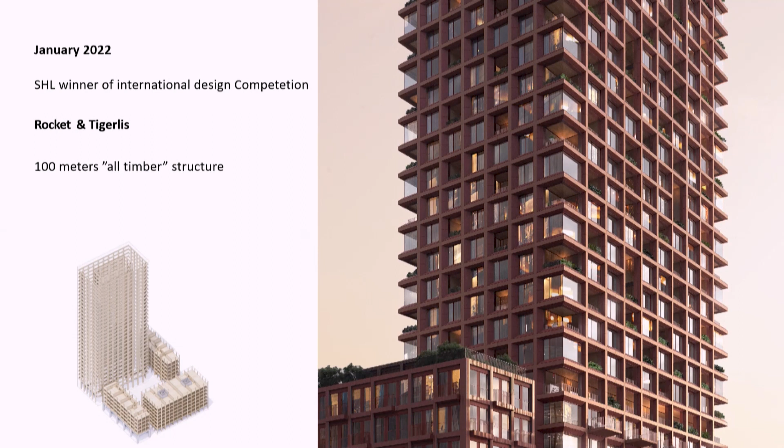But first, is this working a little bit slow?

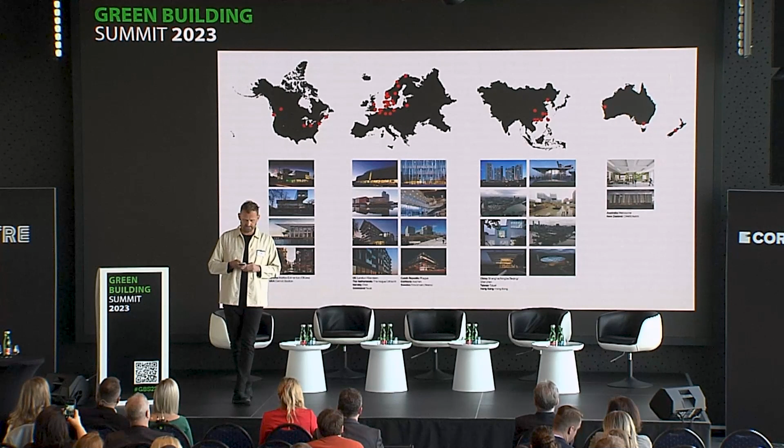Our portfolio is also all around the world. Of course, the main load of our work is around Scandinavia and in Europe, but we are also working in Asia and as far away as Australia and North America. One of the reasons that we get around the world is our qualifications on libraries and public buildings. We have built libraries in New Zealand, Australia and Canada. But as a firm, we have the full scale of work, from very small projects into master planning and urban planning. We span quite wide, but the main load of our work is, of course, buildings in the middle.

The context to frame our present work is, of course, that we are facing this heavy CO2 emission that is a big threat to the globe and to our climate. And a large part of that comes, of course, from construction. And we all know now that the climate crisis is real. I think you need to be very hard-headed if you should object to that. And that has, of course, created an increasing political awareness during the last decade.

We were already in the early zeros. We already had a big first take on sustainability and having a policy in the company. But we faced, as everybody did, the crisis in 2008, the financial crisis, and then we lost momentum in a way. But then we got started again after the crisis. But what we have seen, all of us, is this political awareness has increased, and that has actually speeded up the process. So many of these things that I'm explaining about is more or less our current environment in Denmark with our politics, and it's more or less the same in Scandinavia, I would say.

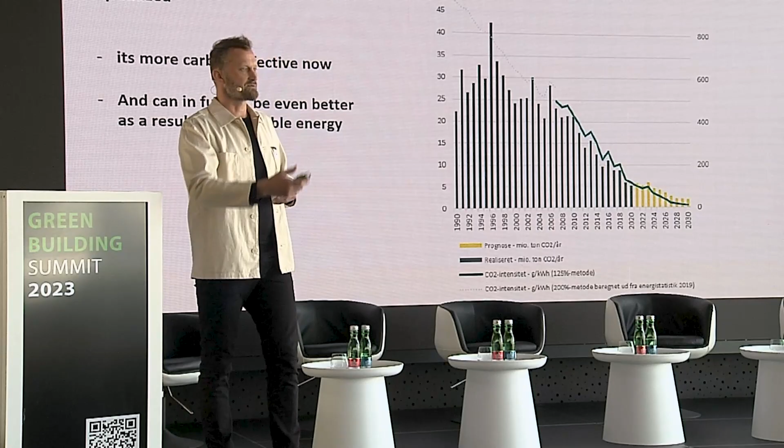But this is what we have experienced during the last 3-4 decades, that the codes and the standards have improved a lot in the way we produce the energy. Everything has been optimized since, I would say, the 90s, and it seems like we have reached a point where we get as good as we can, even with sustainable and renewable energy. When I came here yesterday, I drove from Austria, from Vienna, through this big area of the windmill park, and this is the way forward. So when you look at the curve, it seems like we have done well and optimized the way we produce energy, at least in Denmark.

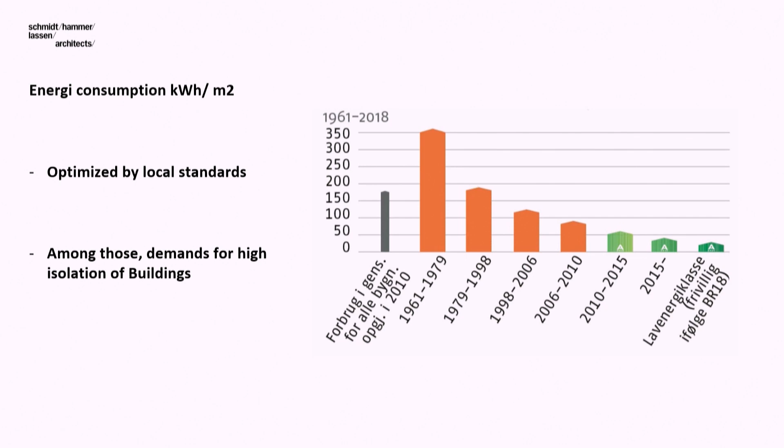So another thing that we have optimized during the last 3 to 4 decades, since the oil crisis in '73, where the Arab countries closed the well, then we got the first focus on energy and heat insulation. And since then, we have actually, as you can see, made our buildings more and more effective in regards of energy consumption, in regards of insulating the envelope, even to an extent that I would say that it's even too much how we insulate it. If you focus on the carbon emission that comes out of that insulation, we have reached a point where this is also at a top level.

So where we can do better now is actually on the resources we build into the buildings. That's what's happening right now, and that's what it's all about when we talk about embodied carbon. And worldwide, I think it's 39% of the carbon emission actually comes out of what we do in our industry. And of course, if you separate the numbers, the operating energy and carbon still takes a lot, the 28%, but we could work with those 11% that come out of the embodied materials. So this is what we look into.

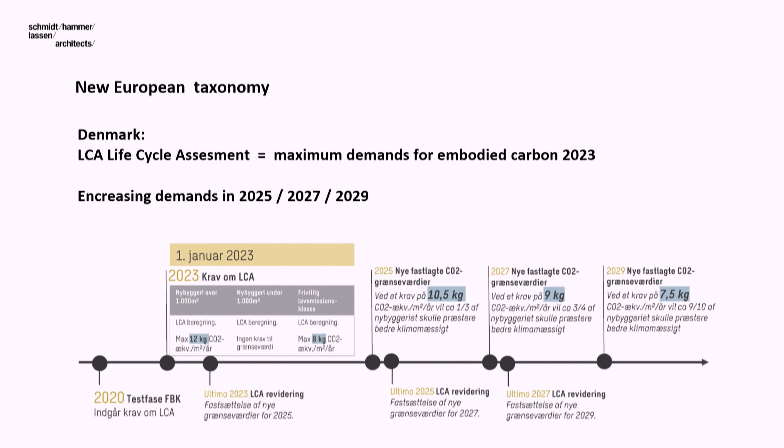I think in the first lecture it was mentioned that we already this year in January started to work with a restricted amount of carbon that we can build into the projects. And this is how it looks right now, that we need to calculate this during the process from the early stages in order to secure that we know what we are doing actually. At the moment, the target is 12 kilos per square meter, and we did the first test in the office in a very early stage. And it's not complicated to do these calculations. It's just because we don't know it. It's actually quite an easy tool to use.

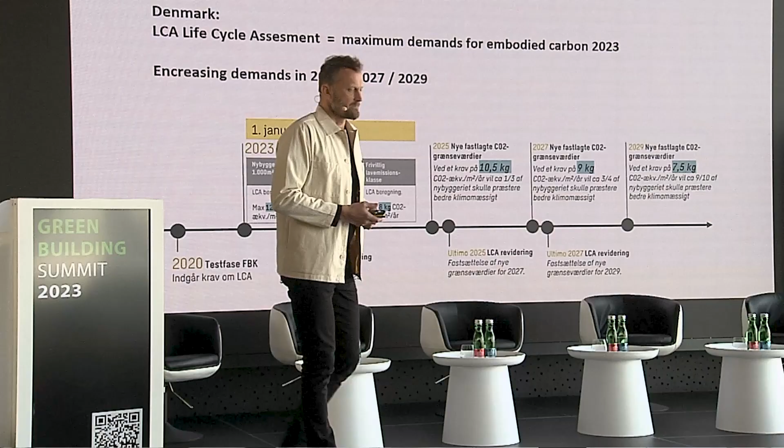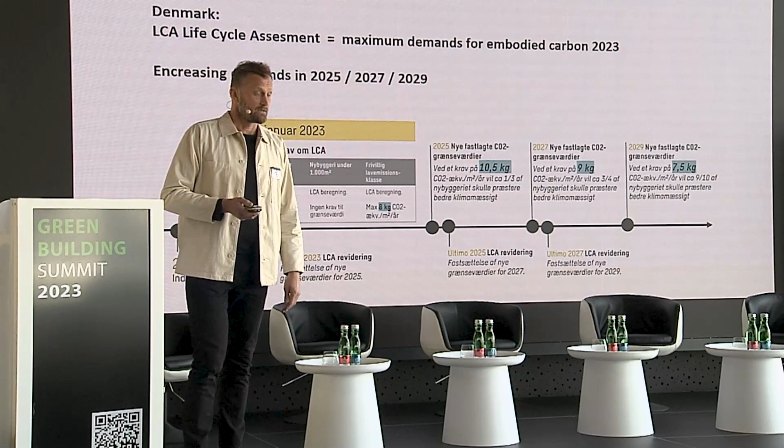But we also can see that it's not a very ambitious target, those 12 kilos per square meter. So we must speed up that process in order to get down to where it gets to be a game changer in the industry. And that doesn't happen in '25. It happens maybe in '27. There we are where we need to be, or maybe even in '29, I would say. But this is the way we work in Denmark now, and I can say that it's not frightening. It's not a lot of documentation. I think it's the way forward for all countries.

So it's very easy for me to say, but I think it's as simple as this: we need to replace as much as we can with wood. I mean, steel and concrete, we still need it in the foundations, in the zones that have contact with the soil and the earth and so on. But we need to change the way we build today from a concrete world into a timber world.

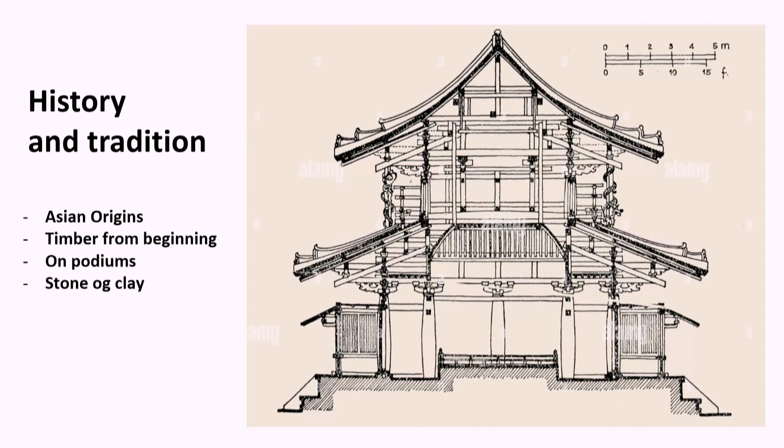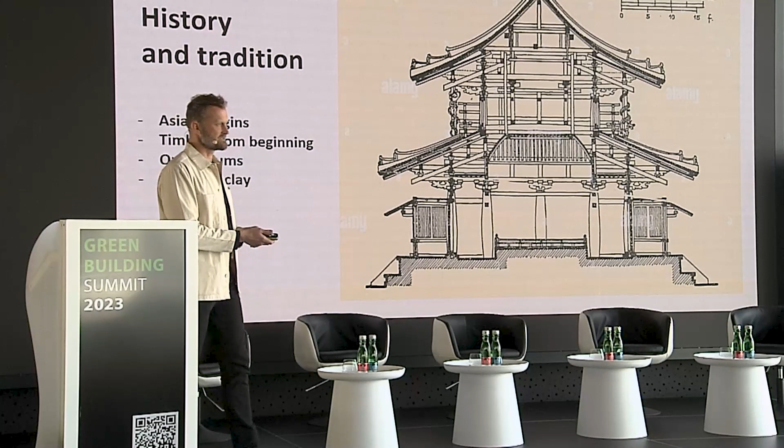And that's why I want to look a little bit back into the history and tradition, because, it's a personal opinion, but I think that what we see as architecture actually originates from some of the earliest civilizations from Asia, and has created the languages that all architects are still using. And this is typically timber architecture, because those were resources that could be harvested, they could even be grown. And then you would, of course, lift these constructions and structures, a little bit fragile to moisture, up on podiums, either of earth or stone. So this is 4,000 years ago.

And locally in Denmark, we have a tradition that, I mean, with the Greeks and in southern countries, you can find the palaces, you can find the Roman temples, the Greek temples, still more or less intact. In Denmark, buildings from the Iron Age were made out of timber and wood. We can only find the black spots when we excavate areas from that time. But this is how it looked, this is how it started. It was all organic, all bio-based materials, but with a very beautiful and understandable, it's very hard for you to see, but a very clear structure.

Even in Slovakia, in your local context, I didn't visit this, but I think that you still have these buildings in the mountain region. So it's a part of our common building tradition that we need to refine and revisit today. So we need to look back, but we also need to look ahead. A little bit about what we have done in Schmidt Hammer Lassen.

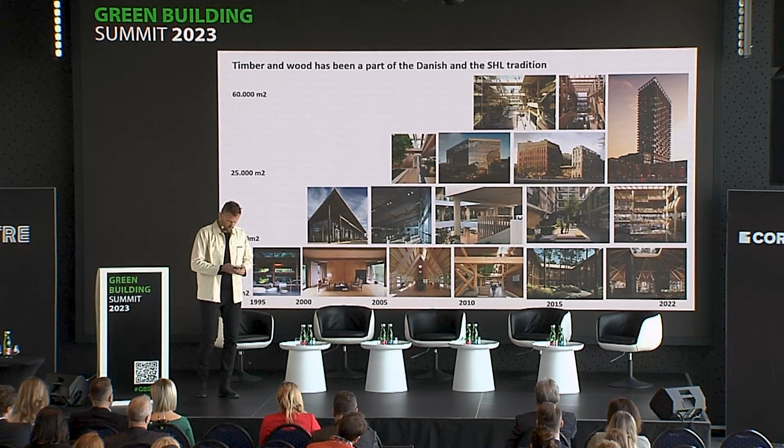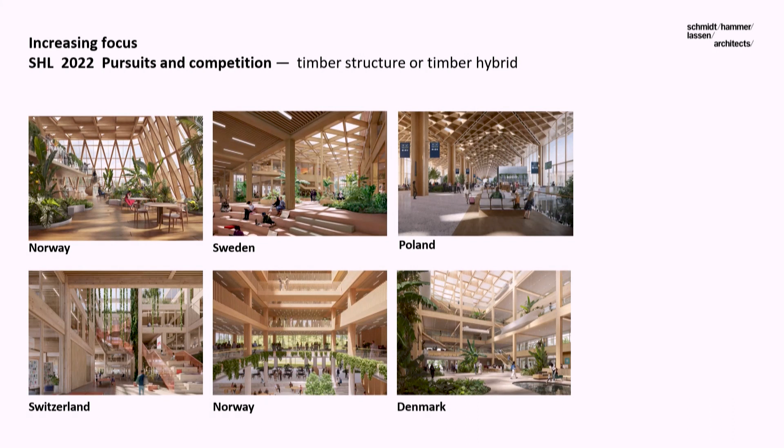Right now, our focus on trying to implement timber as the main structural material is so strong that we did 10 competition proposals last year, and out of those, 8 of them were either pure timber projects or hybrid timber and concrete projects. So it is really our main focus at the moment.

It's hard to explain in these photos, but one of the things that you experience when you go into timber structures and wooden-clad buildings is this amazing indoor climate and environment. It's a game changer. It ties into the well-being of people, and that is amazing, since we all need to build with timber and wood in the near future.

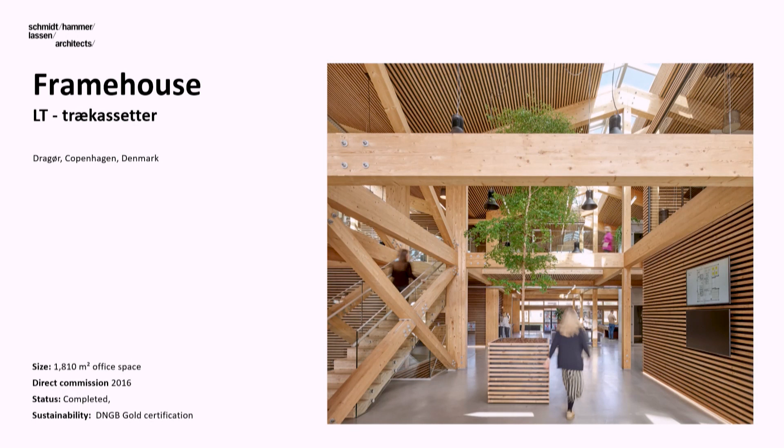Another project is a very simple one. It's also a prototype in our portfolio. A very small office building. It's a shared office facility, and the idea is actually quite simple. For as long as I can remember, we have had sports facilities, swimming pools, farmhouses built in this frame technique, similar to what some of the American cultures did when they settled the American countryside. And this is again very low tech, very simple, old school techniques that can be built up to a certain scale.

And this house is also an example. If you have the chance to go there, it's an example of an amazing indoor climate, where you have a fully open office on 2 stories with a lot of different small companies sitting in the same building, but with none of the problems that we know from modern office buildings where there's terrible acoustics, even in this one.

So it's hard to explain when you show the images, but it's a real game changer.

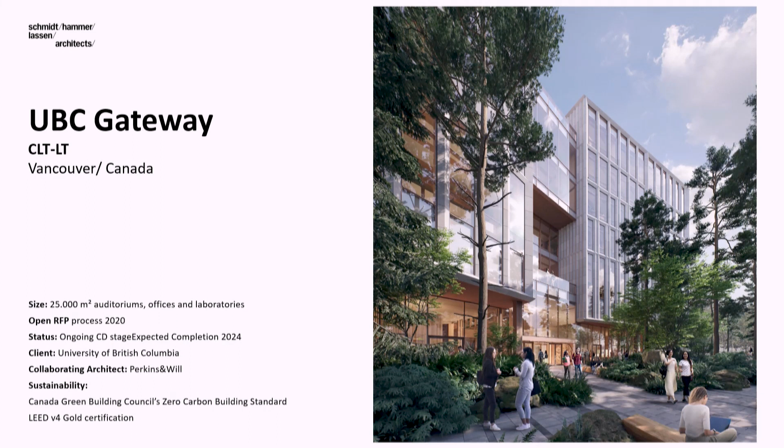Then we have somehow scaled this up in a project in Canada, where we are working on a university campus. This is more or less the same idea, but scaled up into a larger scale, 25,000 square meters. You can see some of the interior, and the feel is more or less the same as before, but now this is getting bigger. This project already had its groundbreaking, so it's something we can investigate in a couple of years.

And that is also laminated timber and cross-laminated timber, all of it.

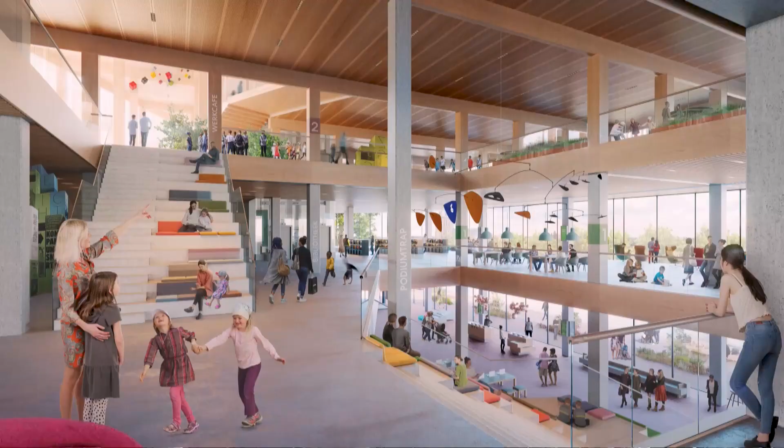Another example is a competition we won in Dordrecht, Netherlands. All the Netherlands is, of course, below water level, so even though they have this risk of flooding, they also accepted to build in timber. The first couple of floors is built in concrete to reduce the risk when it floods, because they know it will flood. But then we have a hybrid of timber and concrete in this town hall building.

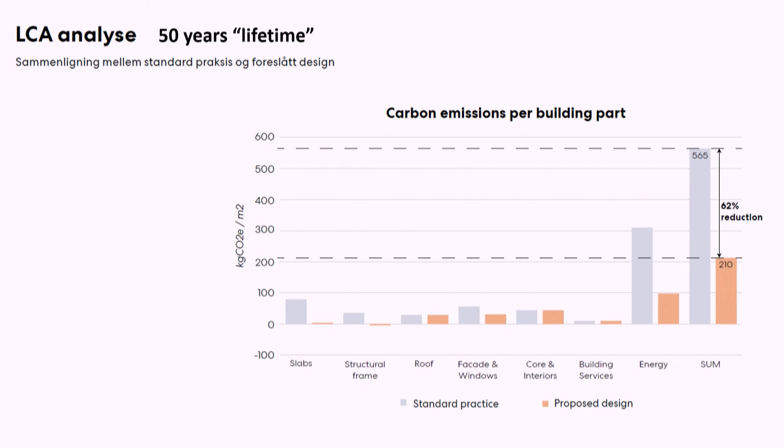And for now, in recent years, we started, even when working in competition stages, to analyze quite early in order to see where we can improve things, because we know that the earlier you start modeling and working with the building mass and these issues, that's where you can make the big impact.

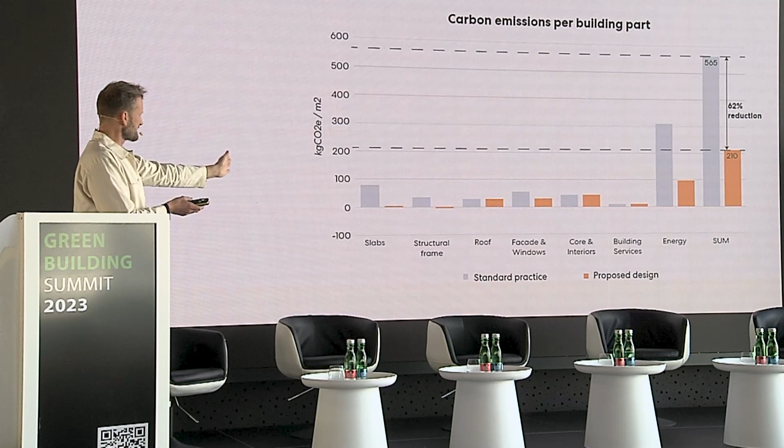This is a very rough calculation based on a competition proposal, but it shows how it compares to a traditional concrete and steel structure, where you can see the different building elements compared over a 50-year lifetime. We can still see that in the 50-year lifetime, the energy is, of course, one of the big consumers. But what we are working with as planners and architects is all of this, the heavy building parts.

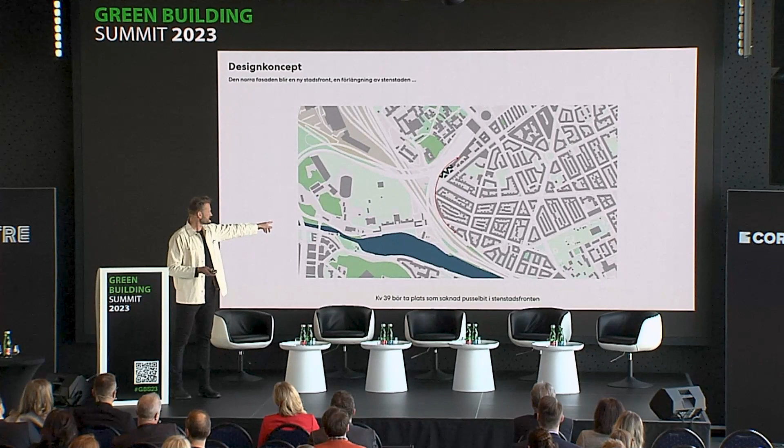And then to Stockholm, where we recently also won a competition about a life science building, which is this one here. It's somehow finalizing the city center, the compact part of Stockholm, and the conditions, the neighbors, is this big transportation highway in the surroundings of the city center.

And the building consists of one element, which is this zigzag shape structure of laboratories and workspaces, and two little buildings for professors and people who are working in this facility. It's also supposed to be, or projected to be, a timber structure.

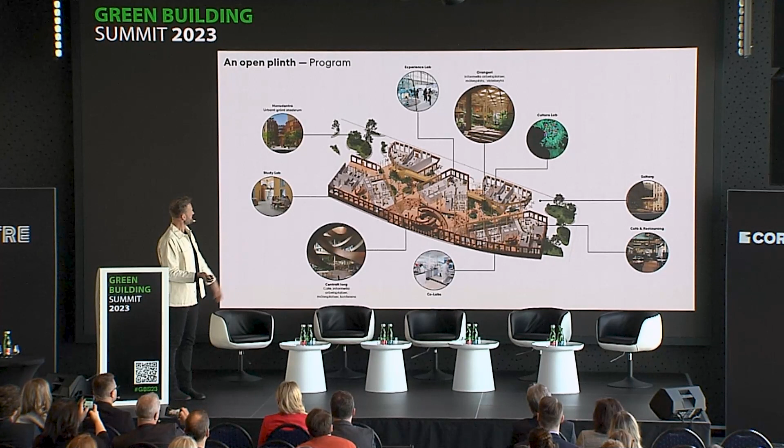Here you can see, of course, a lot of thought about social sustainability, all the involvement, all the social activities is always a part of the projects that we do. Now my focus is on the structures. So again with these atriums where you can see all these chances where people can meet and exchange thoughts and ideas.

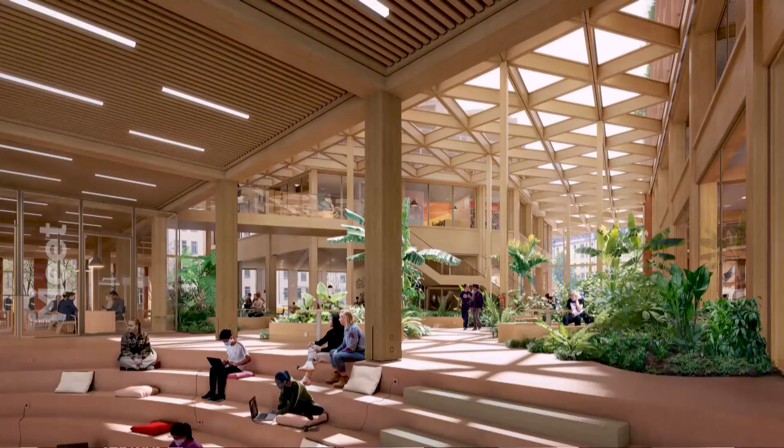And that will also be a typical project where we have the timber lifted up on a podium, maybe for the parking, maybe for the basement situation, we have the concrete, but then the rest of it would be a full timber structure.

And finally, a little bit more thorough, a little walk through this project. It's a 34,500 square meter development. It's not a big one in our terms.

Because of the market at the moment, we hope to get started soon.

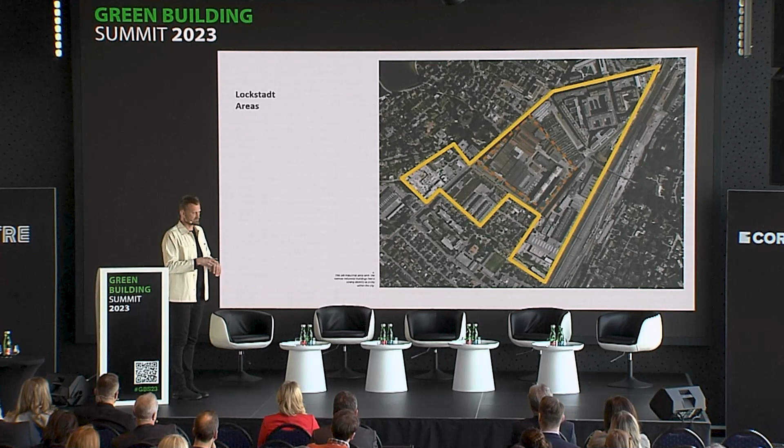So this is an example of regenerating brownfield, as Corwin talked about. It's an old factory area, a city within the city in Winterthur, where they used to produce locomotives, which is why we got those funny names, the Rocket and the Tigerli - these two engines. The area is integrated in the city, but it's a brownfield area developed in certain stages.

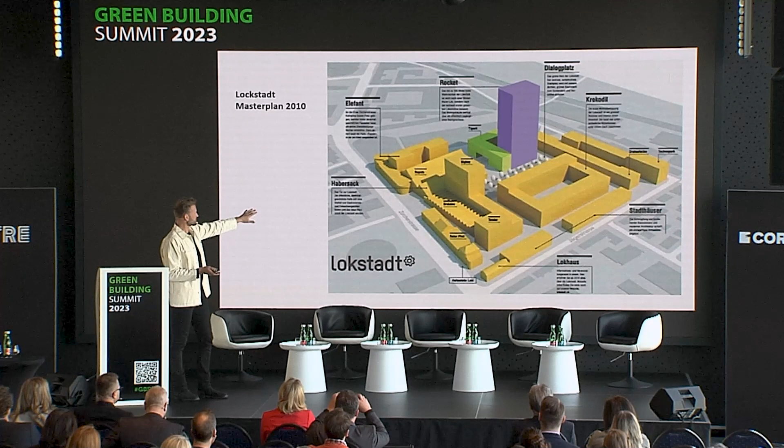The one I'm talking about, the Lokstadt, was actually the master plan done by a known Swiss architect back in 2010, the master plan that won. In that master plan, they indicated there should be a tall building as one out of three in Winterthur as a focus point in the new development. At the moment all of the other plots are more or less developed, so our project is the last one.

And the context is - you might call it romantic, but it has character, this context, because of these industrial buildings where the architecture is readable. It's no-nonsense architecture, and for some reason there's a lot of brickwork in this area, in these factory buildings. So this is the context that we started working in.

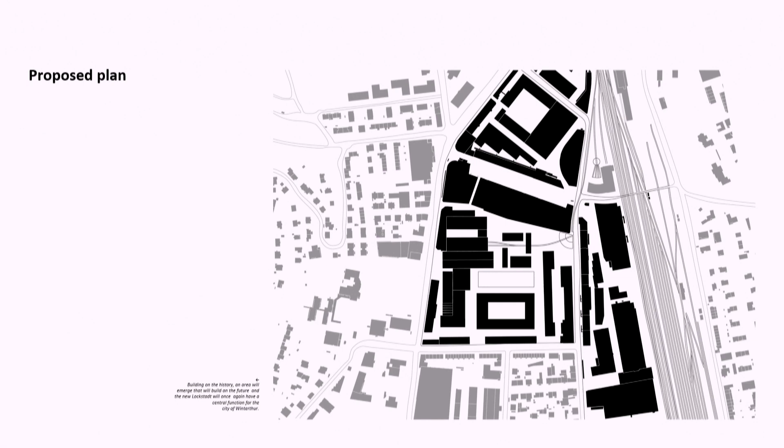More or less, this was the situation before starting to develop the Lokstadt. Then there was the master plan that we proposed, and we are here in that block. The idea was - this is the volume from the master plan.

Our idea was to try to merge the volume into the history of the industrial fabric and then cut it up, separate the buildings, and create a space in the center that would be more open than the volume told us to do. So actually we somehow cut free the four different buildings and separated them.

That makes sense because in the brief from the competition, they all had different functions or at least different program - those four buildings: a hotel, a family building, a student building, as well as the tower.

We also thought that by separating the buildings we would make it more simple but also more flexible in order to develop, but also for future refits of the buildings over time.

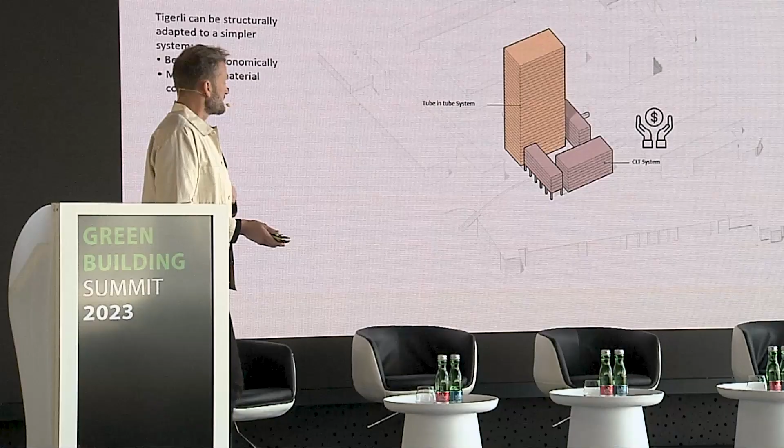And the client already had the ambition - they already studied this and prepared the building technique for at least the tower, which I will come back to, the so-called tube-in-tube system.

And then we said we propose, by separating the building mass, that we can downscale the low-rise into an ordinary CLT and laminated timber building.

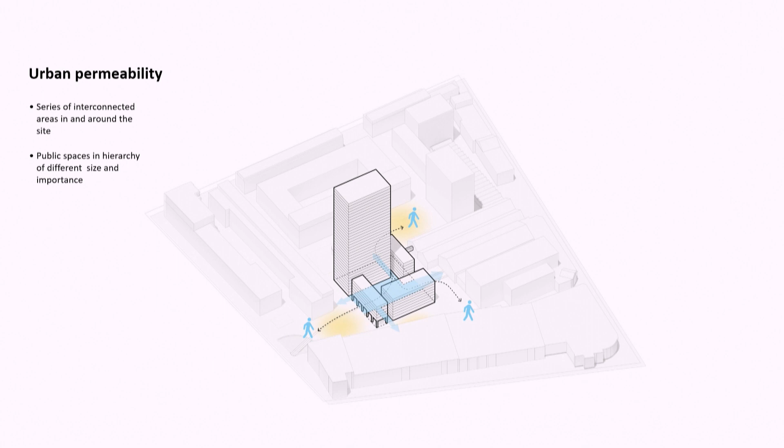Also, we created this transparency, permeability in the urban fabric that would increase the social sustainability. And we also, by taking the corners out of the buildings, allowed more sun and daylight into the courtyard.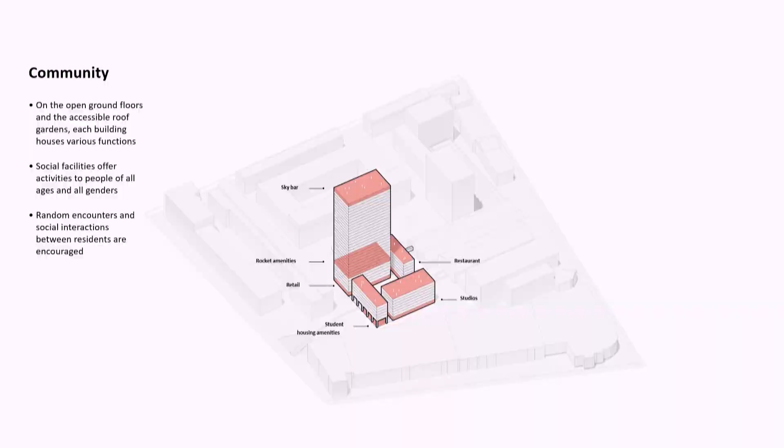Thoughts about public functions in the ground floor, community, and quite an easy pattern of accessing the building.

Of course, utilizing all the roofs with greenery, to create biodiversity as well as in the courtyard. And this is the overview of this.

Again, back to this kind of permeability, which was something that broke with the program and the brief, to make more connections in the local area.

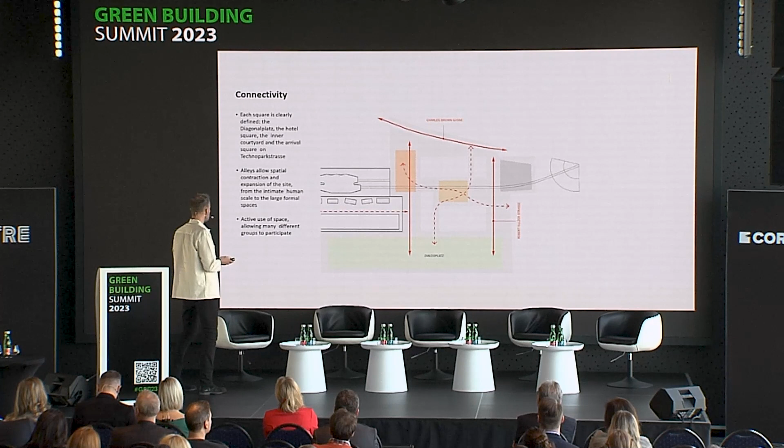So looking a little bit into the building - very open ground floors with as much public attention as possible: retail, lobbies, workshops, and restaurants.

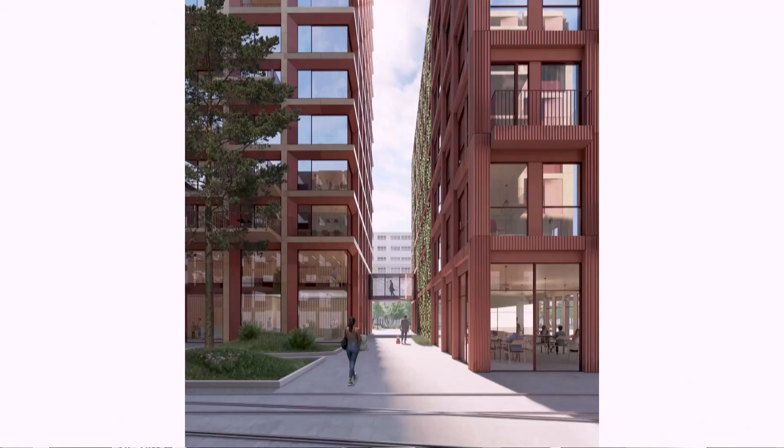And this gap in between the buildings, it's all timber, it's only 5 meters. The 5 meters is some kind of global, or at least European, standard for the fire spread or the jump, in order not to have very expensive material, at least in the windows.

And again, creating areas for semi-public use for the tenants on the rooftops here, creating amenities for the many inhabitants in the tower.

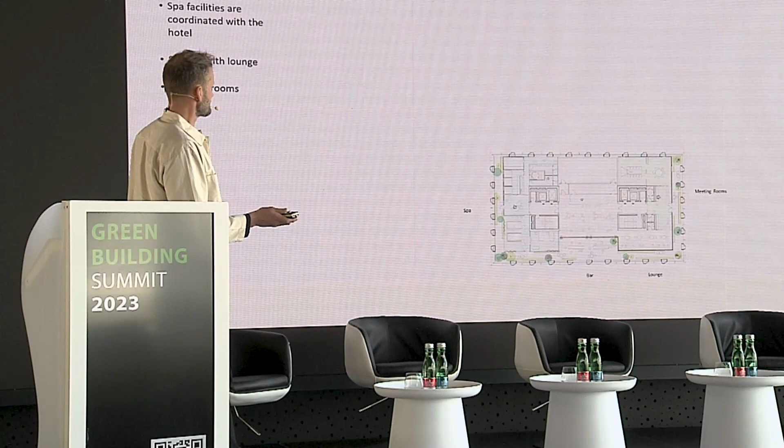And on the very top, on the penthouse, there's a function we don't know what it's going to be - a public bar, cafe, restaurant, whatever. It's a demand from the city.

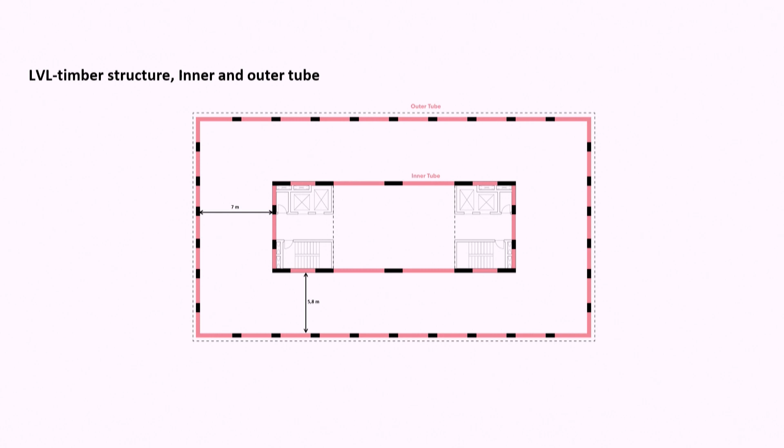A bit about the structure. They did a lot of investigations together with the university in Zurich and a Swiss engineer, Walt Galmarini, who developed the system together for a couple of years.

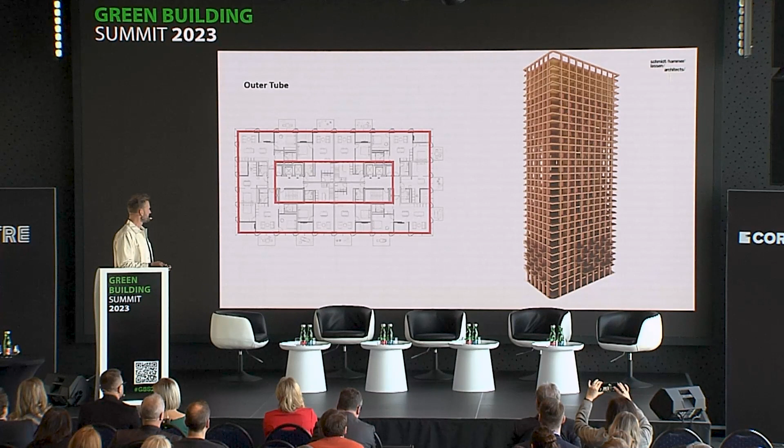This is more or less what we got out of the brief, that it should be a system like this. We started working with the inner core, which is sometimes cast in concrete, but in this case everything is timber, like an old skeleton framework, connecting with the outer tube. This is more known in timber structures at the moment, having the outer tube and the slabs in timber.

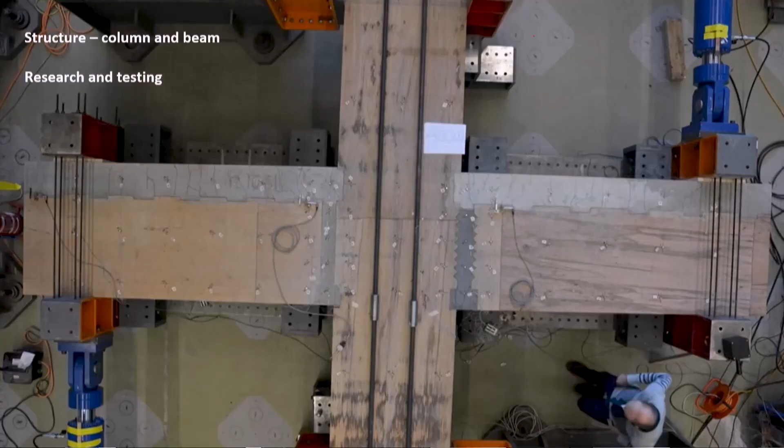Showing how it looks when they did a lot of tests at ETH in Zurich. It's been tested and documented for a couple of years, developing this new system.

These are very massive beams, similar to plywood, LVL, a lot of thin layers of plywood glued together, similar to what we know from tabletops. But this is just 40 centimeters by 90, so very big, heavy dimensions.

The attempt is to somehow glue it together, tie it together at the knots with as little concrete and steel as possible. This is the slab, how they proposed the construction: a 5 centimeter thick plywood board with a bit of profiling for rods that keep the distance in this composite slab.

Then it's filled with insulation, and on top a concrete cast, maybe 12 to 15 centimeters. You get a composite slab that uses the different materials where they are best, for tension and compression. With these calculations, you can easily see it's almost a third of the CO2 compared to steel and concrete.

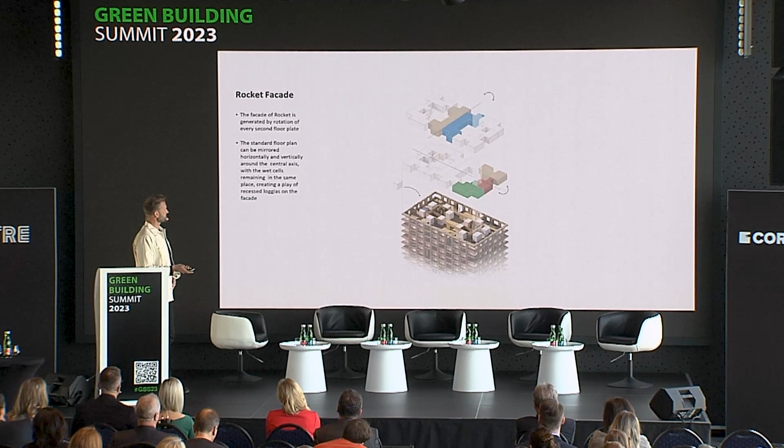I think I've reached my time, but I'll flip through these very fast. It's a very simple system, we celebrate the structure. It's quite simple and rigid, but the facade becomes more vibrant by rotating every second floor 180 degrees, creating a pattern that isn't as stiff as you might imagine, giving a more lively look.

We have the option of a lot of variety in the units: duplex, single, and dual aspect apartments of different sizes. They can be combined in many different ways, which we believe is also very sustainable, since you can vary this in the future.

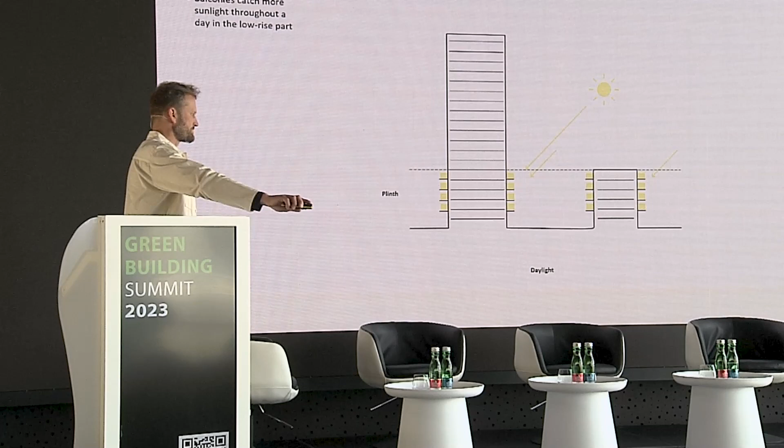This is a typical plan. In a tall building, we always think about how to separate the different layers. In the low rise, we have balconies on the outside, which could activate city life by having life move out into the balconies. Further up, it shifts into loggias inside the tower, because the higher you get, the more uncomfortable it becomes with wind conditions and height issues.

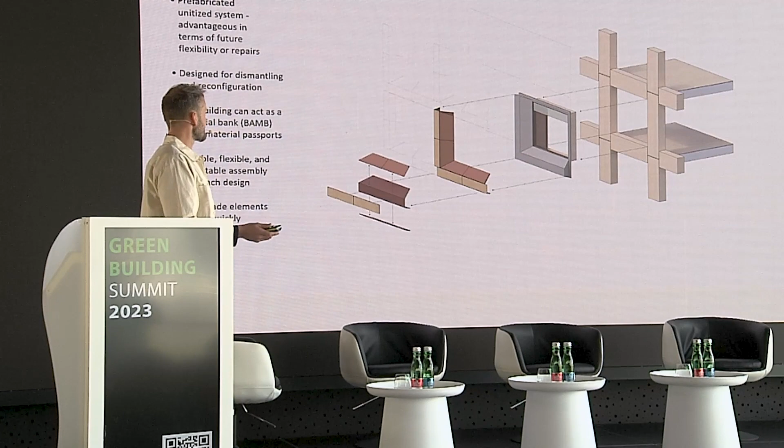We think the facade system is also a prefabricated system, similar to the rest, cladded with burnt clay terracotta. We could have found a material less carbon heavy, but the fact that it lasts forever is something to consider, because with big proportions we can disassemble these elements if we can't now, the next generation can, and then it can be recycled and reused again.

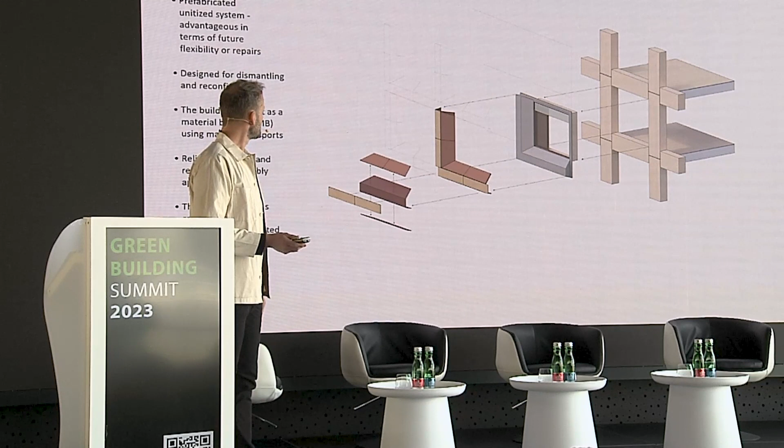This ties back to the local material choice, just done in a modern way. This is what you have in the area, and this is the new interpretation.

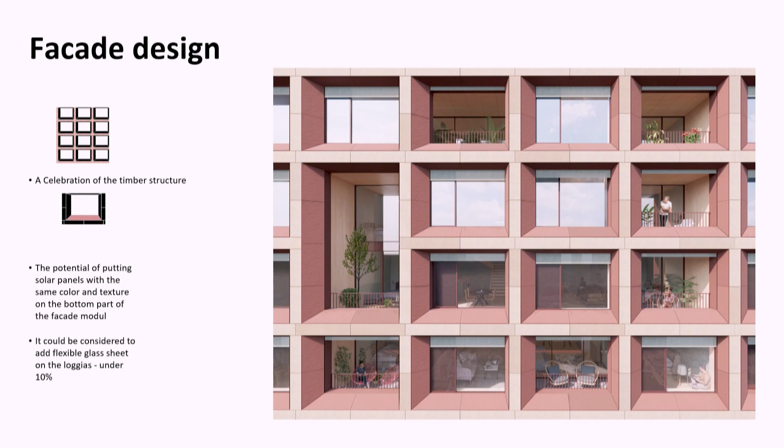Again, it's a very simple aesthetic pattern. We celebrate the structure because this new technology is what the project is about, and we just make a few variations in the structure of the facade.

So finally, just a few remarks on the way forward. I think, as we do today, it's so important that we all share our knowledge when we have it, in order to spread the knowledge and the know-how.

We know that every cubic meter of wood stores approximately almost a ton of CO2, and we can definitely grow this resource if we start, say, 60 years ahead. Then we can continue growing. This is an important fact as well, it's not something we'll run out of.

I think this was more or less the last slide. Yes, thank you.

So thank you very much, Mats, for your presentation. I think you carry on with the keywords refuse, reuse, remix from the first presentation.

Our second speaker is Mr. Johannes Rebhahn, Head of International Timber Projects from company Wiehag, who will share his know-how and specifics of timber constructions from reference projects all around the globe. Johannes studied structural engineering at TU Graz and Lisbon before joining leading glulam provider Wiehag in 2002, and is currently head of international projects with responsibility for all jobs outside of Austria and Germany. I think that's it from my side, and the floor is yours, please.

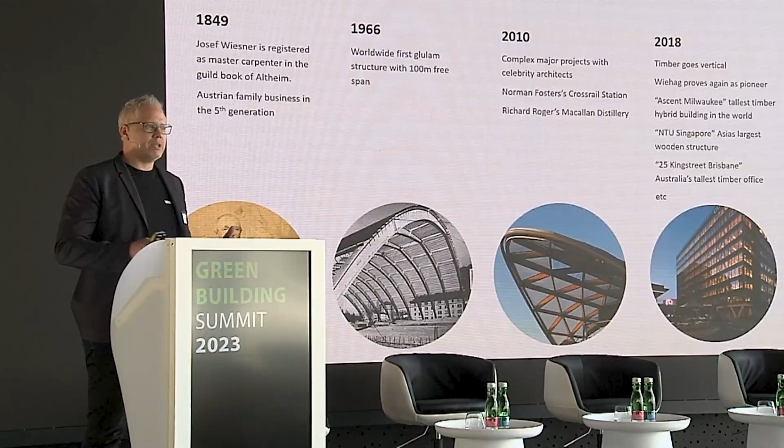And the development was like that. You can imagine we always ask the client, maybe you can build it in timber, we fight it against steel, we fight it against concrete. And now from that, let's say, freak show, from this niche market we have been in this timber industry, it's now going into the direction of mainstream. And that led to the decision that we made a new factory line focused on multi-story buildings, on high-rise buildings. It's still in the same place, but that's now the most modern line for making high-rise buildings in timber.

We do not only produce timber, we have a real holistic approach. From our DNA, we are engineers. We have 25 engineers in-house. And so we do early stage support. If you as architect want budget costs or feasibility checks, we can help you.

If we are the lucky contractor on that job, we do then the full engineering and design, because normally the timber company is responsible for the structural engineering. It's a bit different to steel structure or concrete structure, where an external engineer takes the responsibility. In timber, normally the timber company is taking that over, and it's the timber company's insurance who is backing that up. We do then, of course, the manufacture. We have project management, and we deliver it wherever it is in the world, and we can install it also.

Where are we? Not far away from here, 350 kilometers to the west, somewhere in the middle between Munich, Salzburg, and Vienna in Altheim. And we have a few sales offices also around Europe.

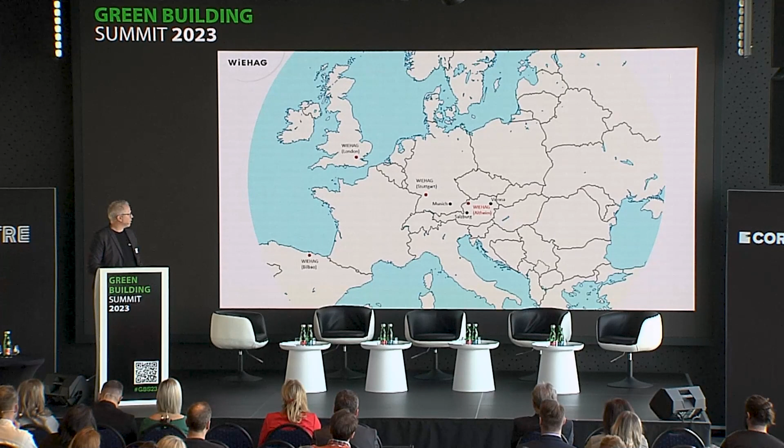What is necessary to do a project in timber? Of course, we start with the engineering. As said, we have a strong in-house design team. And so you start with the total stability, with the member design, the connection design, which is most important in timber projects. And then you do your 3D CAD model. We even have some specialists on parametric design if it's getting really complex.

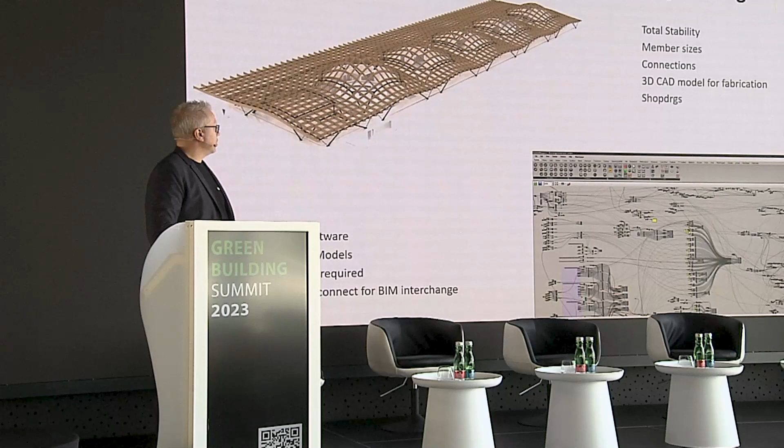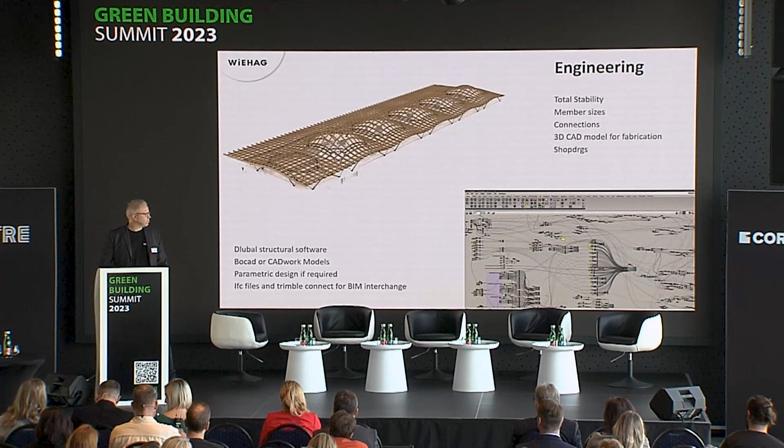And this engineering is simply the most important part. I think there are a lot of architects in the house, and I can just recommend to bring a timber specialist early into a project because it's not fruitful, and everybody's frustrated if you're running several weeks in the wrong direction. And that might be if you as architect, together with your engineer or the client's engineer, are designing an isolated timber building, and then at the end you realize it doesn't work, or the industry cannot make it. So early engagement of timber specialists would really help every project.

And it's a teamwork, obviously. So as I say, don't work alone, work with timber companies at an early stage. We normally make a kind of design workshop in the company, to bring all together. We can make a mock-up, you see like that. That's a very small detail of a huge job. And yeah, that really helps in the progress of the meeting. You learn from each other, you avoid email wars, you can talk to each other after a workshop like that. And it definitely makes sense.

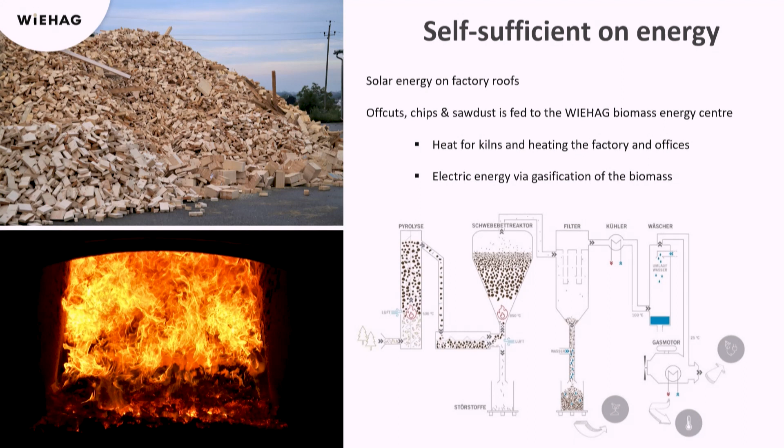Once the design is over, which is definitely a long period, can be a few weeks or a whole year, depending on the size and complexity of the project, we procure sawn timber. We source that quite locally in a radius of 200 kilometers. That means it's from Austria, from Bavaria, or Czech Republic. And we kiln it, and that kilning, that drying of timber needs a lot of energy, but we have a lot of energy. We don't care about the oil price, the gas price, because we have it on our own. So all the chips and the sawdust is transferred to heat and even to electricity with a kind of gasification process.

The finger jointing is kind of the miracle of glulam. You can cut out big knots or failures of a board and glue it together, so you have a homogeneous quality of timber, and exactly that quality that the engineers are designing with. You apply a glue and a hardener, and then you can shape it and glue it in different shapes. This is already CNC controlled. These pressing beds can be curved, can be straight, whatever you want.

And then, of course, the CNC machining, which is really exact to tight tolerances. So timber construction is more exact, more precise than steel or concrete structures. But of course, we always have to manage the interface between steel and concrete and steel and timber.

Pre-assembling of steelwork is really, really important because on site we want to have a kind of IKEA flat-pack system. Just stick it together, put some screws on it. If you start to implement steel parts on site, you made something wrong. Or if you see a chainsaw on site, you can be also sure something went wrong. So it's really just getting the sticks on site and putting it together. Also from a health and safety point of view, it's very important that it is then easy on site.

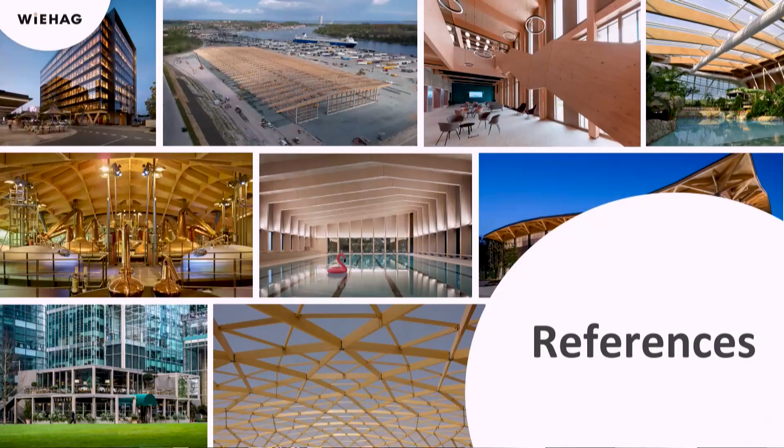Yeah, that was just a quick overview to see, okay, what's involved in doing a timber business. And now I want to show you some references. And I start with the real huge and complex references for which we are famous for. The real, let's say, celebrity jobs in the timber world.

One is that, the Macallan Distillery in the Highlands, close to Aberdeen, designed by Richard Rogers. It's one of the most complex timber roofs in the world. It's hard to get the feeling on this slide. You really have to be, and if you're in Scotland, you can't miss it. It's one of the most important visitor attractions already. So it's a new distillery, including a visitor center. It's a cathedral to whiskey, but also a cathedral to timber.

Norman Foster's Crossrail Station in London, 300-meter long, so the longest timber building in the UK. A combination of ETFE pillows and glulam. It's also a public space, so you have restaurants on both sides of that tunnel. It's a station for a new train line in London. So again, worth a visit. If you're there, you can simply enter it.

Another huge project done in Israel, 105-meter diameter, so really long span structure in a dome structure. So sometimes it's a pity that you need a roof on top of it, but yeah, you need that.

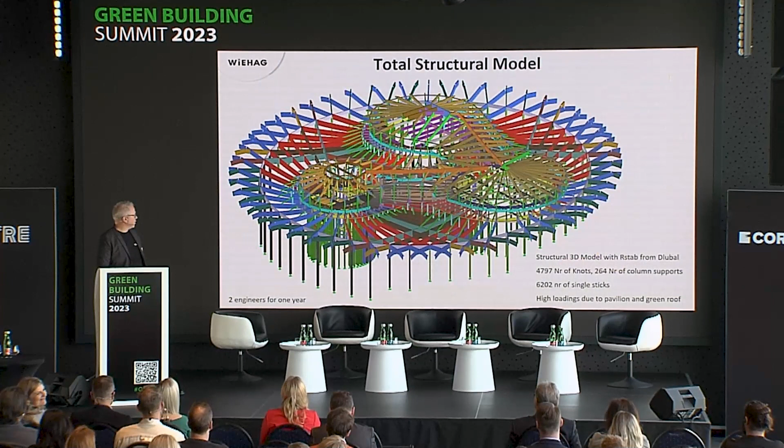You see here, quite important timber connections. Models like that need a while. So 2 engineers worked for 1 year to create that model. By the way, it will be opened in '24. Really huge connections. Timber design means most of the time connection design.

So the member design itself is not the critical thing, but how to transfer 2,600 kilonewton meter with timber is critical. And how do you hide it? How do you embed it? Because normally the architects don't want to see it. There are some who want to express it, but the majority says, please, I only want to see timber, but you have to transfer a lot of loads.

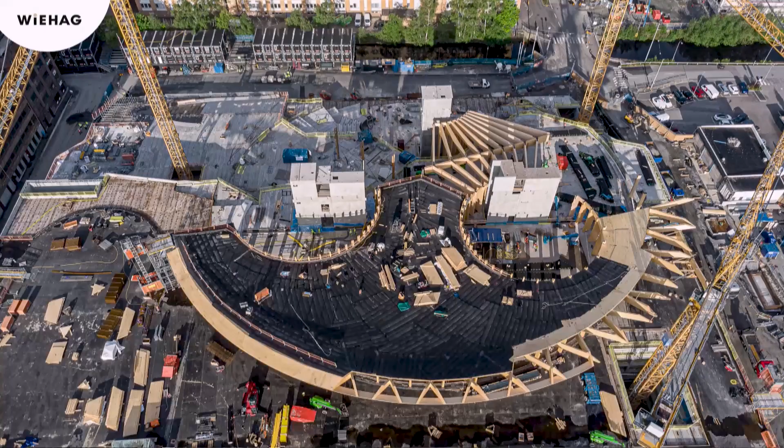So that was, let's say, a series of really huge and complex projects. There are just a few in the world of it. Normally, they land automatically on our table because there are just a few companies able to do that. But we can't survive from these big projects. If they are shifted for 2 months, we would be empty in the factory.

So we need also a lot of medium-sized, small-sized standard jobs, which I show you now, like a typical swimming pool in Ireland, or quite famous swimming pool in England, which won a lot of awards, and it's really neat and clean design. You don't see any steel here.

You probably know the Eton College, most famous college in the world, and we did just recently a swimming pool and a sports hall for them. Quite traditional design, but it's a traditional school. One of these posh colleges where money doesn't play a role, where the budget is really always unlimited, and the architect can be an architect. And the architect's baby was the glulam roof, so they made it really complex, 3D shaped in a lot of forms.

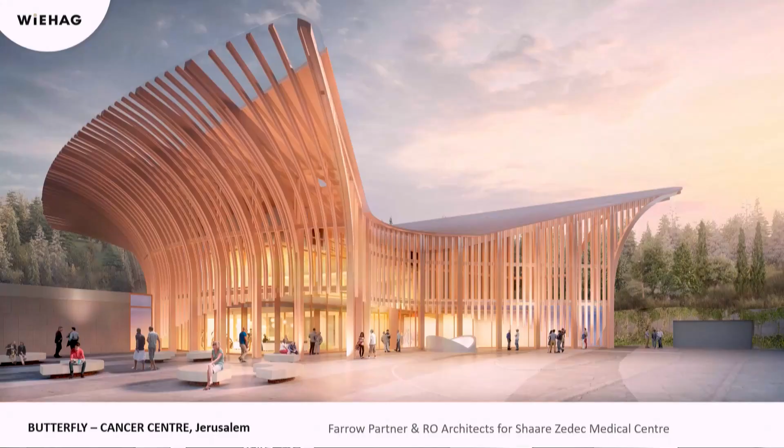This is also a strange structure. It's a cancer center in Israel done by Farrow Partners. They are a real expert in biophilic design. And you can imagine if you are going into a cancer center, you're not in the best mood. So you want to have a real nice building, natural, curved, and so on. We just finished our part, so it looks on site something like that currently.

A small restaurant in the middle of London, surrounded by really high steel and glazed towers. City of Odense, I think we will hear something more about that today. We built with Kengo Kuma, another celebrity architect from Japan, the Hans Christian Andersen Museum, which was an important part of the whole city development, I think. A few pictures of that. So this is a series of, let's say, medium-sized, small-sized, but very, very architectural projects.

Maybe some of you have been already here. It's in Slovakia, in Bachledka, a treetop tower. We built around 15 treetop towers around Europe already, and so also one in the north of Slovakia.

If you go a bit away from, let's say, high-profile architectural, we do also industrial jobs, logistic houses, warehouses, and they can be also made in timber, and they have been done in timber since ever. This is the Stora Enso factory in Sweden, completely done in timber, 13,000 square meter, or a huge warehouse, logistic hall in Germany. It's quite often in Central Europe a combination of precast concrete and timber, but now more and more it's complete timber, so that the columns are also in timber.

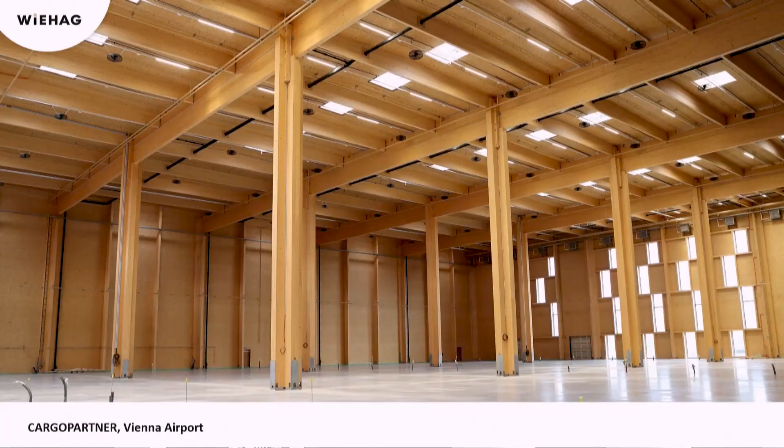Vienna Airport, built already 10 years ago, similar system, completely in timber, cantilevering columns, so there are really huge moments in the bottom of these columns. And just one sample of another industrial hall in Slovakia. We built for Mondi in Ružomberok the industrial hall.

So for us, it's a bit a pity that we work so little in Czech Republic, Slovakia, Slovenia, Hungary. If we work there, we are more or less moving with Austrian clients to those countries, but we are quite open to work more here. It simply didn't happen so far.

And now maybe the main point of today, what you are most interested in, is multi-story buildings. Multi-story buildings for future-proof urban districts is the name of your event today. And I tell you, these multi-story buildings are relatively easy in comparison to what you have seen before. It's just a column, a beam, and a slab. So obviously there are some details to solve, but I'm myself wondering why we haven't built it in the early 70s or so. The technique would be possible.

We could have done in the 70s a thick glulam column, a beam, and a slab on it, but nobody asked us. So now you are asking us, which is good, and now we can build it. So we built the first multi-story building in 2007 already in the exact same system. So glulam column, glulam beam, CLT slab. It was a 3-story building in Ireland. It was a simple job for us, but now thinking back, it was really avant-garde, and it was something special in 2007.

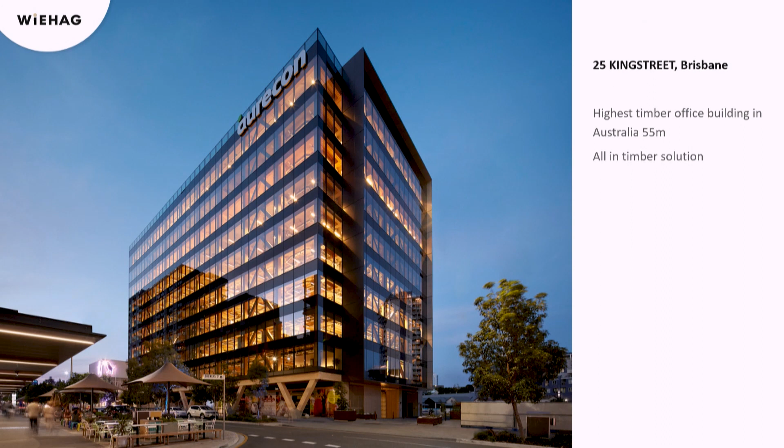We start here with a few other references. For instance, one in Australia, completely in timber, 55 meter. In 2018, so it was the tallest timber building in Australia for a long time, still the tallest office building. So you see here 55 meter, just the first floor is in concrete. A typical 6x9 meter grid, which is quite efficient. You see some pictures of the production, so this is kind of cosmetics, what they are doing here in the factory to plug resin pockets or plug some big knots.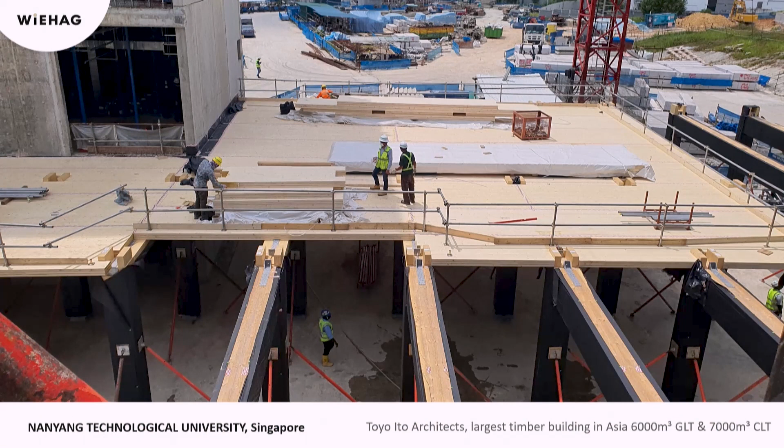The columns are never longer, they're always just one story, because if you would make them 3 or 4 stories long, which is possible, you would have a forest of columns, and then you have to find your way with the beams and the slabs through it. So this is a question that we get quite often from architects or engineers. Why don't you make your columns longer? So just one story long.

You see here the typical traditional combination of staircases, lift shafts in concrete for lateral stability, and then the rest is in timber. Sun protection is quite important in Singapore. So you see how they help themselves. These are some pictures. It's almost finished. I think in a month or so is the opening ceremony of that project.

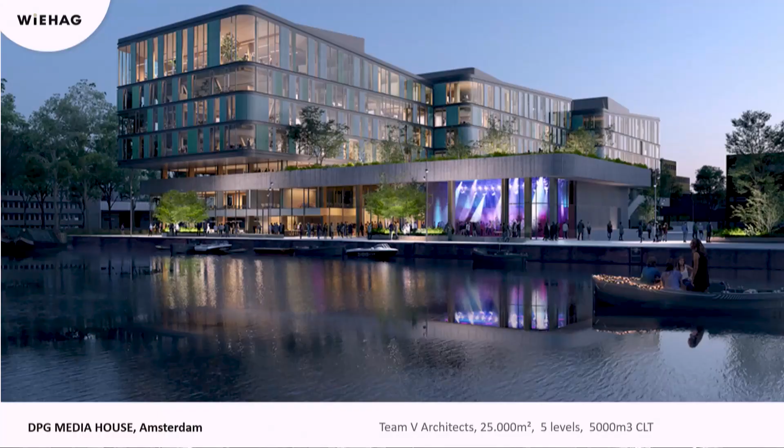Next one is also finished from our side, but still on site. In Amsterdam, the DPG Media Group made their new office block, 25,000 square meter, 5 levels. You see here a combination of CLT and concrete. That means these routings in the CLT are necessary to get the concrete and the CLT activated, so that they work together. And again, columns, beams, and CLT.

You see here then the reinforcement and the pouring of the concrete. That is sometimes used if you have spans over 6.5 meter or so, then the CLT alone is too weak. Then you combine it with concrete, or if you have really high acoustic requirements.

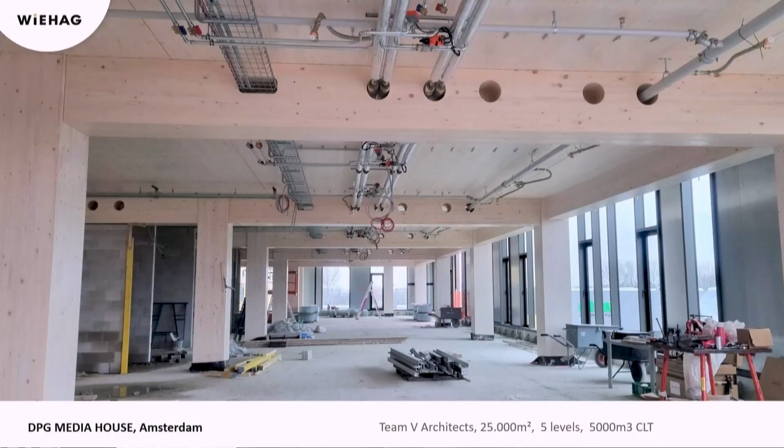That's how it looks like. I always recommend to architects, don't make a Swiss cheese out of our glulam. They didn't listen to me. So a lot of openings here and a lot of M&E, so it's better that you have that either on top in the raised access floor or really behind. It's possible, it simply costs money. And that's how it looks.

Now to the current world record, the tallest timber hybrid tower in the world, 86.6 meters. It's done by Korb Associates, architects from Chicago. The bottom 5 levels are in concrete because this is a park deck, and the rest is in timber. And you see 2 staircases or lift shafts in concrete.

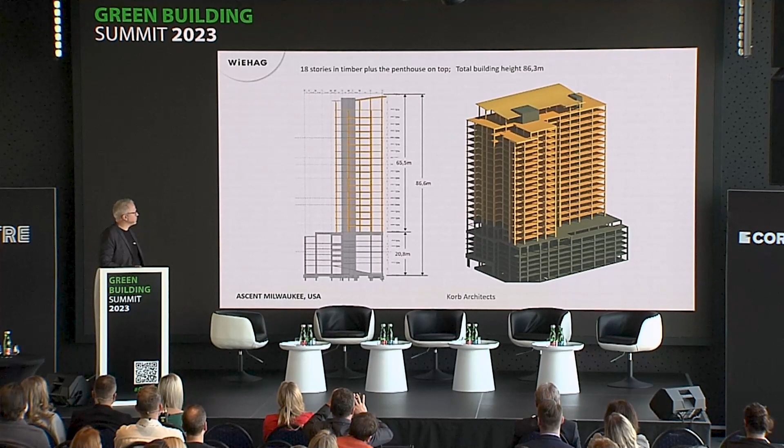So you know how Americans are, it must be the biggest, the tallest, the best. So they have a certificate for that. By the way, the Council of Tall Buildings, this association watches that race of the highest building, highest timber building or highest traditional building.

So you see a lot of information on that website about timber buildings also, can be quite recommended. The grid is quite small because it's an apartment, not an office, so 5 by 7 meters.

And again, pre-assembling in the factory of the steel parts. It was 3 hours fire resistance required on that building, and they worked at a very early stage together with the fire authorities and the mayor to get that approved. So these things are possible if you start early and bring the fire guys in early.

And 50% of the timber structure is exposed, so that was the deal. They said, okay, please cover 50% with gypsum or whatever, but the rest can be open. And we have done a lot of testing, and the 3-hour fire testing is absolutely no problem.

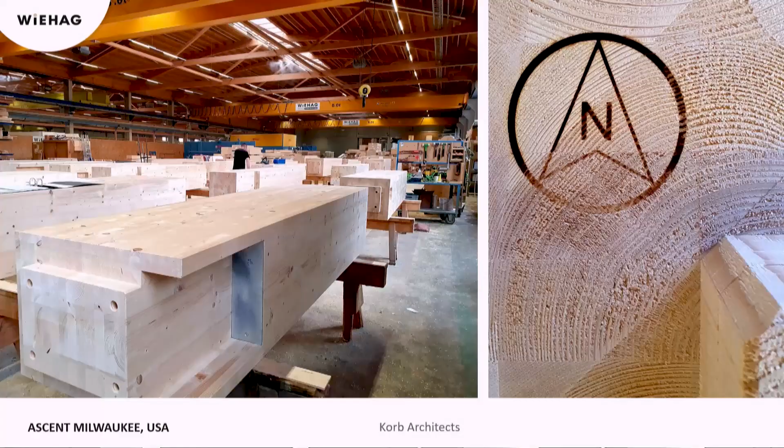We even gave them a northern arrow on the columns and beams that makes it easier to install, so they know where it is. It was a requirement from them.

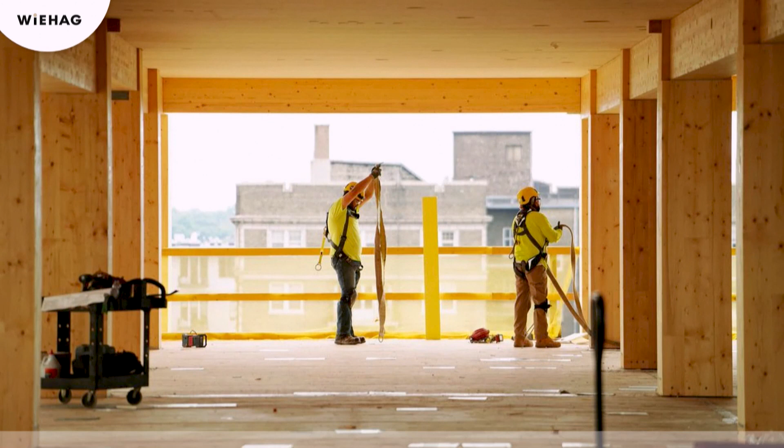And proper trucks in the USA delivering CLT. And that's how it looks then on the floor. They bring in with the crane our columns and beams and then install it. Just a few impressions of that. Again, you find plenty of material on the web about that project, obviously.

And that's not a rendering, that's real, so that's how it looks for the tenants.

Quick summary. If you want to build a timber building, I point out a few key points which make it more successful, hopefully. As I said, early specialist input. If you tick that point, you can forget all other points because the specialist will tell you the other points, but let's follow through: clarify the loadings at an early stage.

If you have a change in the loadings, even just 20 kilograms because you forget some M&E, you go back to square one, and nobody wants that. But don't be too conservative. Of course, it's easy to clarify loadings at the beginning in a conservative way and then add another 50 kilos, and another 50 kilos per square meter. So make a realistic assumption and keep that through the whole project.

And of course, clarify the fire requirements. Is it 60, is it 90, is it 120? Is spread of flame a topic or not? We really need that information at the beginning to start through.

Openings, as you have seen, openings for M&E. I know it's quite hard to clarify that because the M&E partners may not be on board and they don't know what they need and how it works. But it's a really important point to solve at the beginning.

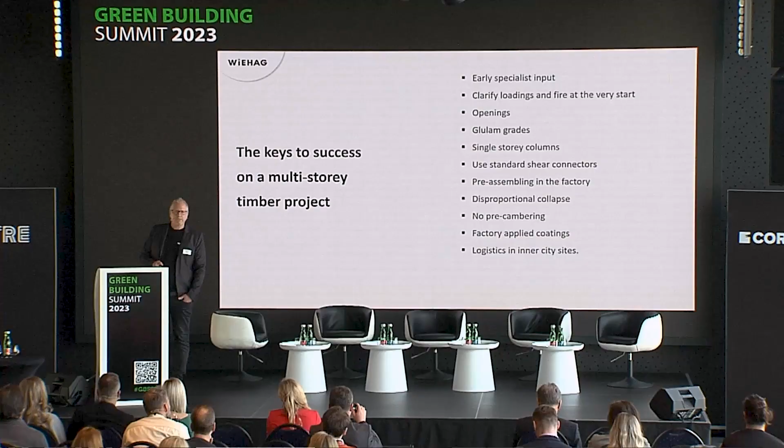Have a think about logistics in inner city places. Of course, it must be just-in-time placement and also on-site. This is a really important factor. And think about on-site what happens with the other works, because maybe we as the timber contractor are finished, but then there are a lot of other works, M&E, they use abrasive wheels, they use sparks, they weld around, they don't care about it. So make them really aware that this is timber and not a steel column. And if you're not able to make that clear, or if they are still damaging it, then you have to wrap the columns and so on.

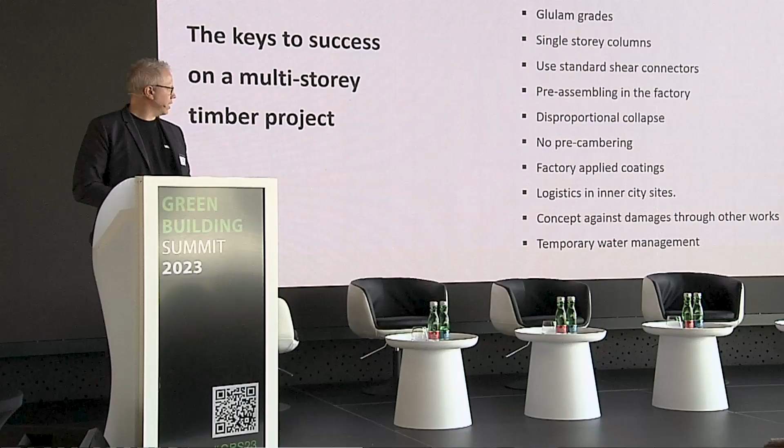We talked a lot, a bit, about fire. But I'm more worried about water, to be honest. Water is the biggest enemy of timber. Therefore, as Mats has shown, the ancient churches and so on were all made in a way that water doesn't touch the timber. On site, during the construction phase, water is, of course, there. You just have to think about the temporary water management. How do you bring it away? How do you tape, maybe, or seal, or coat the timber.

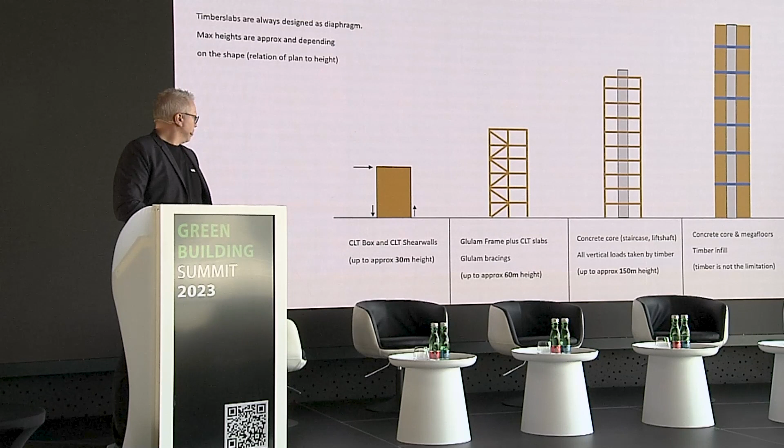So that's quite important. And that leads me to my last slide. It should give a view of what's possible in timber, pushing the boundaries, what are the current limits on heights, and that depends a bit on how you build your timber structure. If you're working only with CLT, cross-laminated timber, so if you make, let's say, a CLT shoebox, you're depending on CLT shear walls and walls with a maximum 200 wide, and so you can build roughly up to 30 meters.

If you make a full glulam frame, we recommend going up to 60 meters. I mean, you can go higher, but if it makes sense is a question. And obviously it depends always on the relation between the plan and the height—a thin needle is not as stable as a chunky shape. But anything higher than 60 meters, we would recommend being rational, making a mix, a concrete staircase, a concrete lift shaft to give lateral stability. And 150 meters is roughly the limit, simply because of the ground floor columns. The ground floor columns get a lot of forces, and at 150 meters they get already really chunky.

You can help, of course, here again with other timber species, or even with hybrid structures. But yeah, I would be happy if Bratislava has a 150-meter height building. Maybe in 2 years I'll say it's 200 meters. Everything is possible. But I think this 30, 60, 150 meter is a good limit.

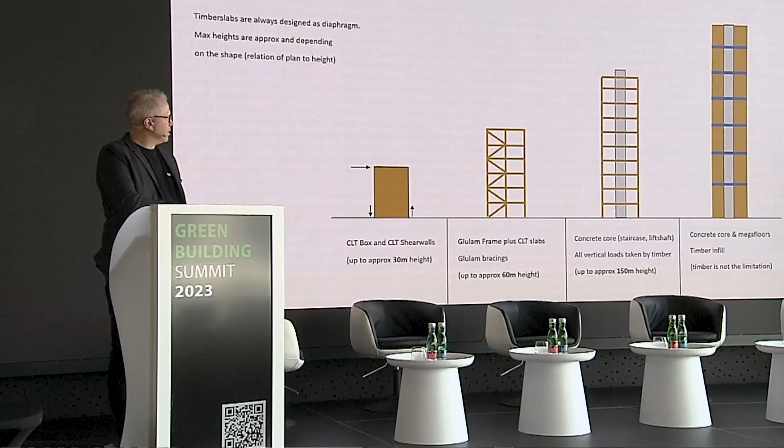Makes sense, and I get quite often these questions: where are the limits? On the right-hand side is a type of structure which has no limit. You have a concrete core and then some mega floors, and the mega floors are made out of steel or concrete, and the timber is just in between. We're currently in the final of a tender for a 180-meter building in Sydney for that. So it's really a lot of timber in structures like that. They can be built however tall you want.

And if you think what's currently possible in Slovakia, it looks like that. Looks like a doghouse, huh? So it's a pity, I don't know why. I mean, I can only guess. It's normally always fear because it's something new, but timber is not new. It's the mankind's oldest building material.

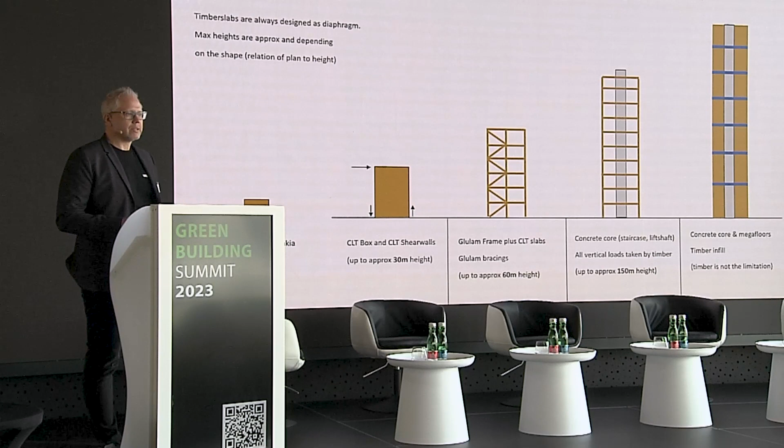It's the fairy tale of the three little pigs, where only the brick house was withstanding the blow of the wolf. These perceptions, and it's the fear maybe of the concrete and steel lobby industry that the cake is getting smaller. I don't know, but I can ensure that there are no technical, no logical reasons to stop at 12 meter. And I hope I've proven that, you see that what's possible, and thanks for your attention.